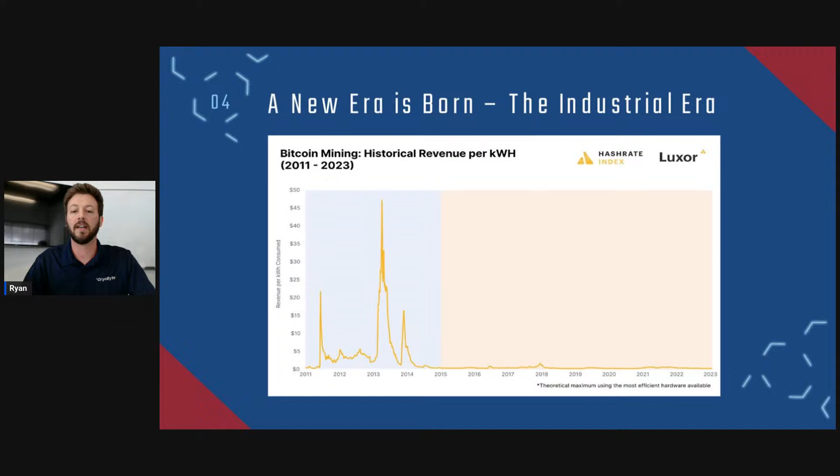But as the heat and competition started to turn up in mining, everybody was in an arms race to gather as many ASICs as they could. They started looking for cheaper and cheaper power in order to get a better profit. And you can see what that did to the revenue per kilowatt hour. It flatlined. And we see that today in the industry. It's a very competitive industry. You can't just take a miner anymore, plug it in, and print money. You have to find a lot of cheap power. You have to have a lot of advanced equipment. So it's very competitive. And my belief is it's going to continue to get even more competitive.

A clear strategy emerged with this industrial era. And I like to describe it as an energy arbitrage. It's not technically an arbitrage, but it's easy to follow. An arbitrage is when you take something of low value over here and you instantly sell it for a higher value over here, and your profit is that margin in between. And this is the strategy that most Bitcoin miners use. You access cheap power, you scale, and you put hash rate behind that power. And the third step, everybody's favorite, you profit from it. And it's that profit in between your cheap power and the Bitcoin that you're producing. That's sort of your energy arbitrage.

Now, there's a lot of evidence of this energy arbitrage across the industry. So in order to drive better profit margins and in order to stay in business, you really need cheap power. So we see that all over the place. We see these large industrial miners accessing low cost and large power purchase agreements. So locking in cheap power for a long time.

You see miners creatively going after stranded energy. So energy that was not monetized before, like flare gas and different biomass solutions, that's geographically isolated. You now can load up a bunch of miners in a container, ship them out to a flare gas site, and as long as you have an internet connection, you can harness that very cheap power to mine efficiently.

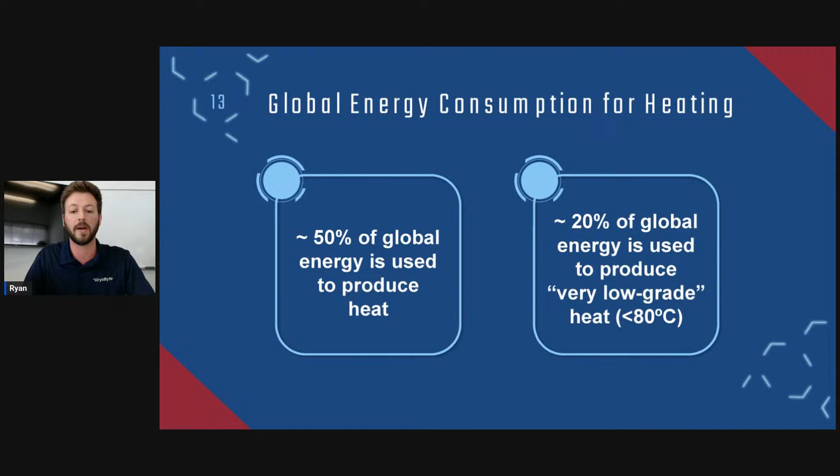But actually 20% of the global energy production is used to produce very low grade heat. This is heat that is less than 80 degrees Celsius. And that number is important because that 80 degrees is now achievable by Bitcoin mining. So another way to view this is 20% of all the energy used in the world produces heat that could theoretically be produced by Bitcoin miners as a waste product. There's a lot of opportunity there to reuse heat.

Here are some of the use cases for that very low grade heat. So residential space heating is the biggest one. 7.5% of all the world's energy goes in just to keeping houses warm, just to keep you warm at night, setting your thermostat at 70 degrees in the wintertime or whatnot. Commercial space heating, the same thing. Heating your water, being able to take a warm shower uses 3.75% of all the world's energy.

And you go down the line with food and beverage manufacturing, pulp and paper industry, greenhouses, which people are using Bitcoin miners to heat, uses 0.75% of the world's global energy. Crop drying and agricultural use. My uncle is actually a farmer, and every year he has to dry out his grain.

When he puts the beans or corn in the silo, he has to remove the moisture from them in order to keep them from spoiling and going bad. And he has to get within a certain percentage or else he gets docked when he sells the grain. But he knows going in every single year, this is going to be a business expense. He's expecting to pay for that heat, and he needs a ton of that heat in order to dry out

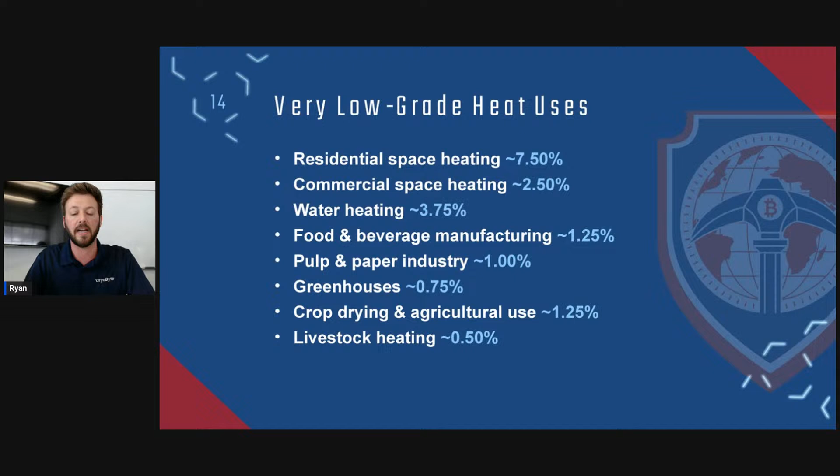his crops. So if you look at all these use cases, there's a lot of different areas where Bitcoin heat could be repurposed in order to save energy that we're already spending. If you compare that to the global Bitcoin network, assuming an 800 exahash network, we're a little bit above that, an efficiency of 25 joules per terahash, and the very low grade heat constant power consumption of 2.5 terawatts, which is just a flattened curve of average production.

If we replace just 1% of very low grade heat, we could more than double the Bitcoin network. And that is crazy. So replacing just 1% of that heat would more than double the Bitcoin network based on the power consumption that we use to create that heat.

Now, as people are saying, I think somebody just commented actually, it depends on the original energy source and conversion efficiency. That's correct. So not so fast. All heat is not created equal. And that's why we wanted to point out at the very beginning how your Bitcoin miner produces heat. It's a resistive heater. And it actually is one of the least efficient ways to produce that heat.

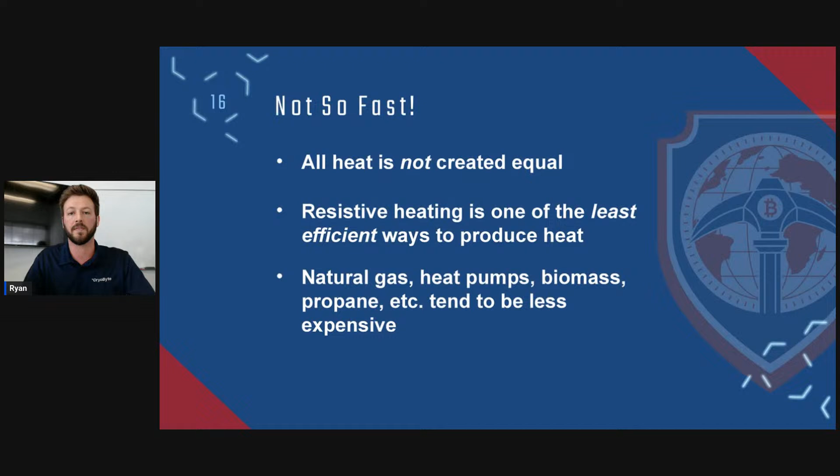That's why we use things like natural gas and heat pumps, biomass, things like that. We don't have space heaters all around our house because we would be paying 3 or 4 times more to heat our home than using natural gas or a heat pump. So it's important to know that. Here's a general breakdown, and this is very ballpark, very relative, or in general. So don't take this as gospel. This is more just as a guideline.

If you were to create heat using different heating methods, this is the relative percentage cost compared to electric resistive heating. So if I were to use heating oil like some old homes do, I could expect to pay 70 to 90% of what I would be paying to create electric resistive heating. Propane, 60 to 80, you can go down that list.

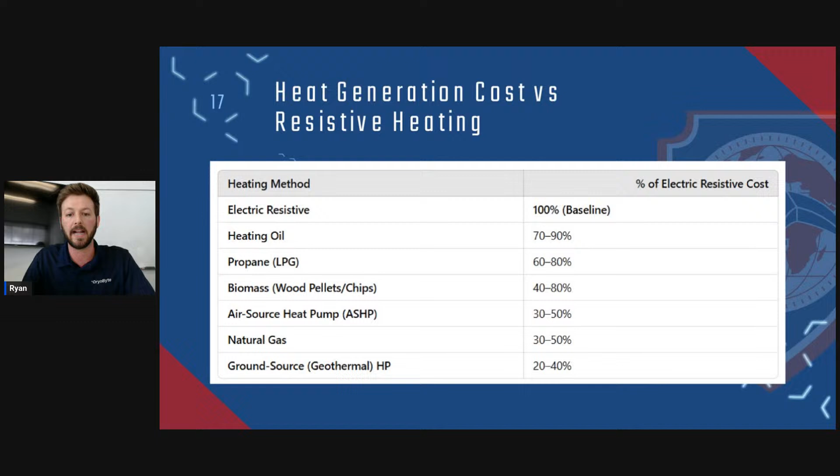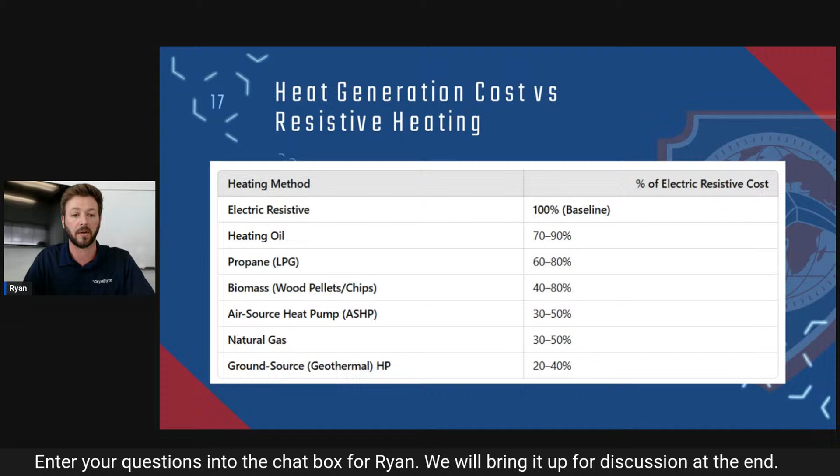If you look at the heat pumps and natural gas, you can see here that running a heat pump or using natural gas to provide heat is usually about 3 to 4 times less expensive than it would be to create that heat using electric resistive heating, aka Bitcoin mining. So you're able to produce heat much more efficiently using different methods. But there's still massive opportunity here, and this is the concept.

There are 2 reasons. So the first is that with Bitcoin mining, you are producing 2 products with 1 energy input. So all those other methods that I just showed you, none of those produce anything of value other than the heat itself. They're not paying you to produce that heat. But with Bitcoin mining, you're producing Bitcoin and you're producing that heat. So if the sum economically of your Bitcoin and your heat production are higher than the inefficiency of producing that heat, you're actually better off economically by producing heat via Bitcoin mining or electric resistive heating.

The second concept here is that heat consumers expect to have a loss. Again, when I'm heating my home, I know I'm going to have an energy bill every month, and I know I'm going to have to pay that, and I'm perfectly fine with that to keep my home warm. My uncle, the farmer, he knows that he's going to have to dry his grain out. He actually uses propane to do that because of his system he has set up there, and he knows that that's going to be a big expense every year to dry out that grain.

Now, this is nice because that means as a Bitcoin miner, in order to produce that heat, I actually don't need to mine for profit. I can actually mine at a loss. And again, as long as my total economic output from that heat and the Bitcoin itself are higher than what I would have paid for that heat, then I'm actually better off economically.

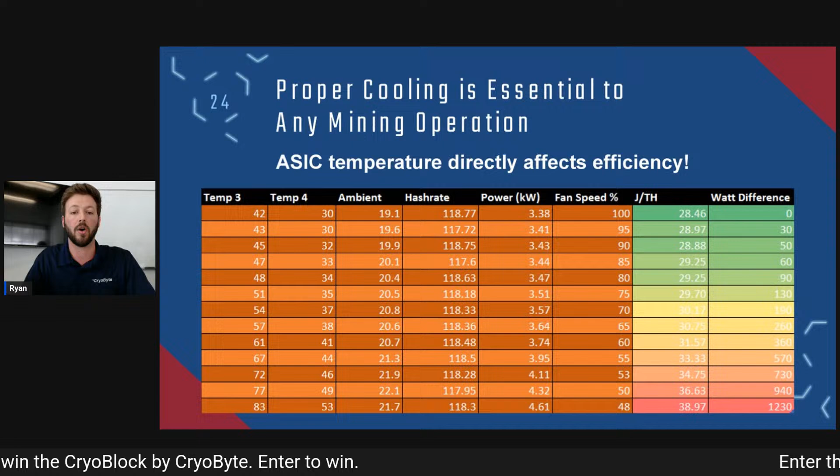As you can see here, once we start reaching 10 and 20 degrees, we start seeing efficiency drops of over 10%. So we're using 10% more energy to hash at the same hash settings simply because our ASICs are running at a hotter temperature. So cooling is extremely important to your overall efficiency. It's a good way to eke out 5 or 10% increases in efficiency just by keeping your miner running cool.

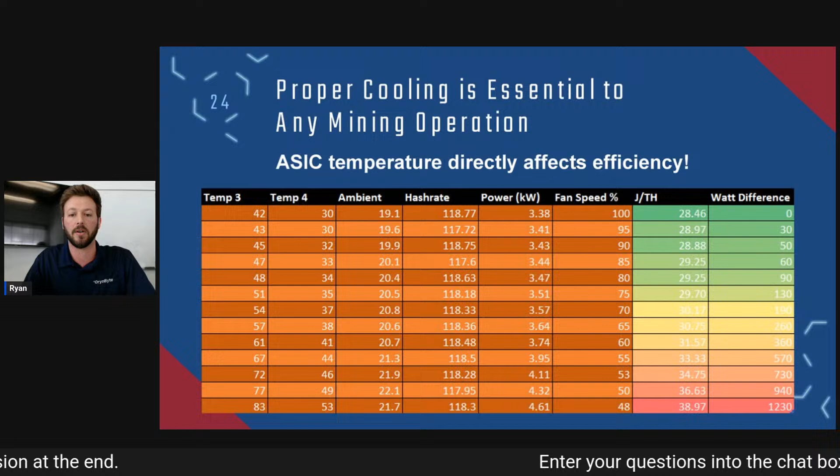And it's not just the cost savings that the temperature affects. Heat can cause thermal stress within your miner, and it can affect the miner lifespan. If you're running a miner very hot and heavy, not only are you mining inefficiently, but you're going to cause that miner most likely to fail faster. It's going to have a shorter lifespan than a miner that is well cooled.

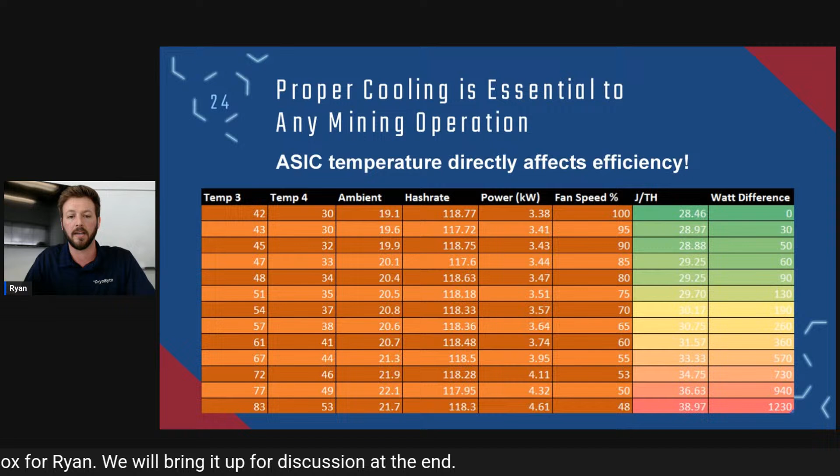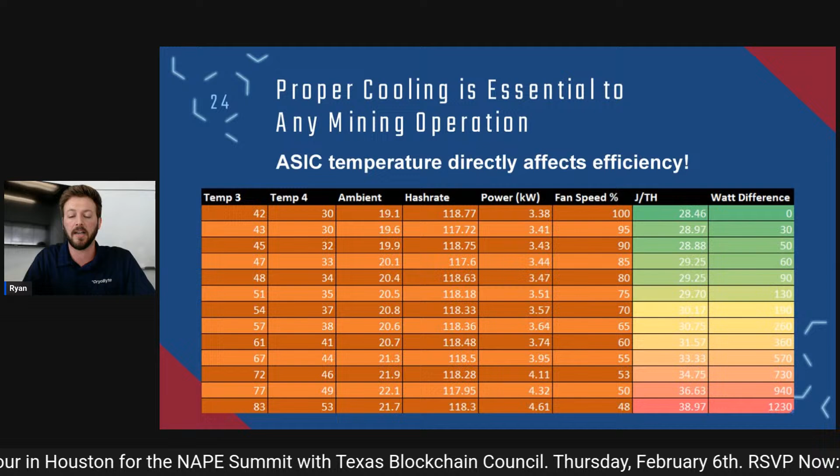So cooling is extremely important, not just for heat reuse applications, but also for mining in general. Even if you're running in one of those energy arbitrage industrial size facilities, you're going to want to pay close attention to how cool you can keep your machines. We were not the first ones or the only ones to discover this. In fact, this is from Braiins, a popular firmware producer. They ran basically the same exact scenario and they had the same exact results.

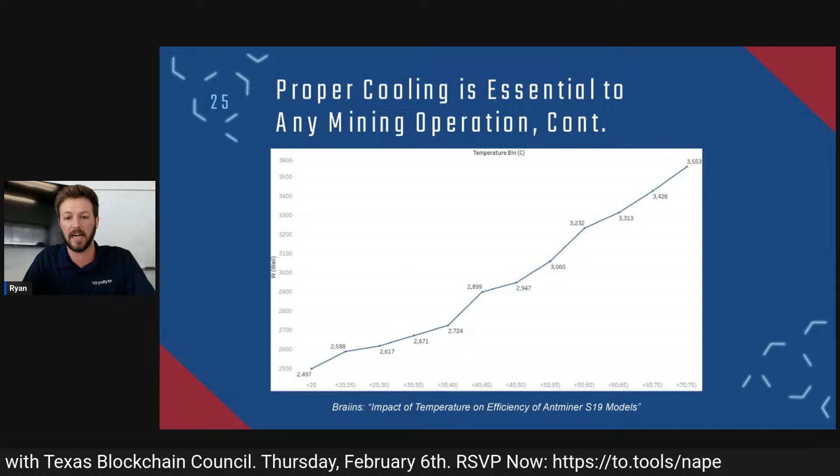You can see here that just based on temperature, you can actually have a kilowatt more of energy use when your ASICs are running hotter. Now that's a wide temperature range, so that's probably not going to be that drastic in real life. But if you're saving a few hundred watts of energy, you're mining 10% more efficiently, you're getting more hash rate, you're using less energy, you have more overhead in your mining facility to put more machines in, you're really maximizing all that energy to its full potential. So cooling is extremely essential.

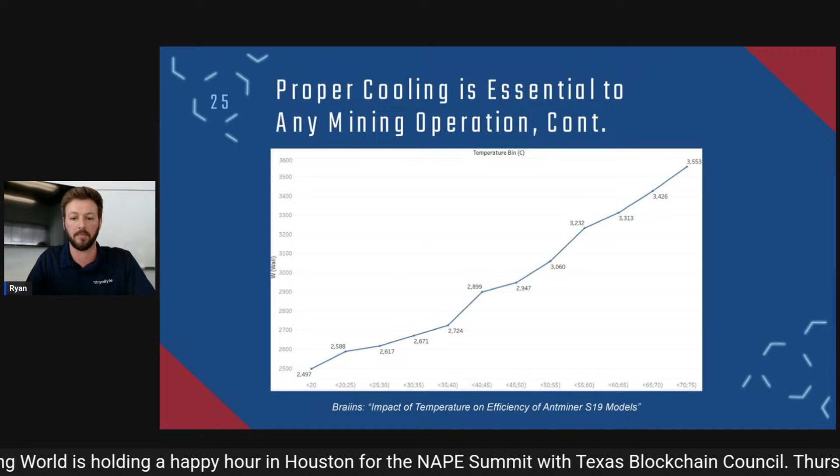Now the question we get asked a lot is, okay, if cooling is so essential, should I be using air cooling, immersion cooling, or hydro cooling? And the answer truly is it depends. There are so many factors that affect this question. So there's no right or wrong method. A lot of miners have cooling methods that they prefer.

So in general, though, what we found is that for smaller miners, if you were to use hydro or direct to chip, you actually tend to get the best cooling performance, which gives you the best overall efficiencies, especially when you account for cost. So there are some small miners that are getting into immersion mining, and there are a lot of benefits to immersion mining. But if you look at the overall efficiencies and the overall cost, for a lot of small miners, hydro is actually a better option.

Now, there are barriers to get into hydro, especially as a small miner. So hydro cooling tends to be focused on the large industrial miners. Hydro does such a good job at cooling your chips that you can actually densely pack a miner and consume a ton of energy in a very high hash rate by cooling with water. So you're creating these very power dense machines that consume a ton of power, and they need to run on 3-phase power. And then you have to have complex cooling infrastructure.

You have to have giant dry coolers if you're moving the heat outdoors. You have to have piping and all this stuff run. So it doesn't make sense for a heat reuse application. You know, I'm not going to put a data center in a greenhouse simply to reuse the heat. But if I want to mine efficiently, and if I want the other benefits of hydro cooling, it's really not attainable as a small miner.

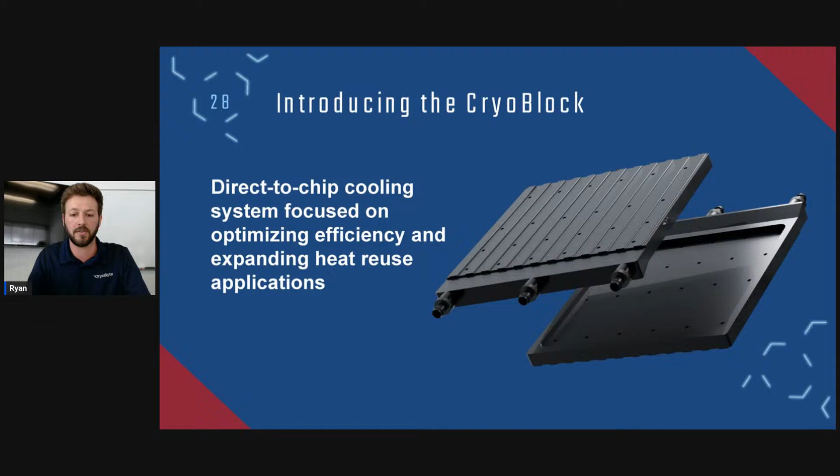Now, what we're pictured here are our CryoBlocks. So the CryoBlock is actually the cold plate of the system. These are a patent pending design that allow you to cool your device much more efficiently. And those are part of an overall upgrade kit. So you can actually purchase an upgrade kit to upgrade an air-cooled miner. And those CryoBlocks simply replace the heat sinks on your air-cooled miner.

So you unscrew the heat sinks, you put the CryoBlocks on, and then you're able to circulate water or coolant through those blocks. You provide better cooling, you capture that heat from the ASIC chips via liquid, and it gives you the increases in efficiency, gives you increases in performance. You can actually overclock your miners by a crazy amount, where the PSU ends up being your top limit and your bottleneck and not so much the temperature.

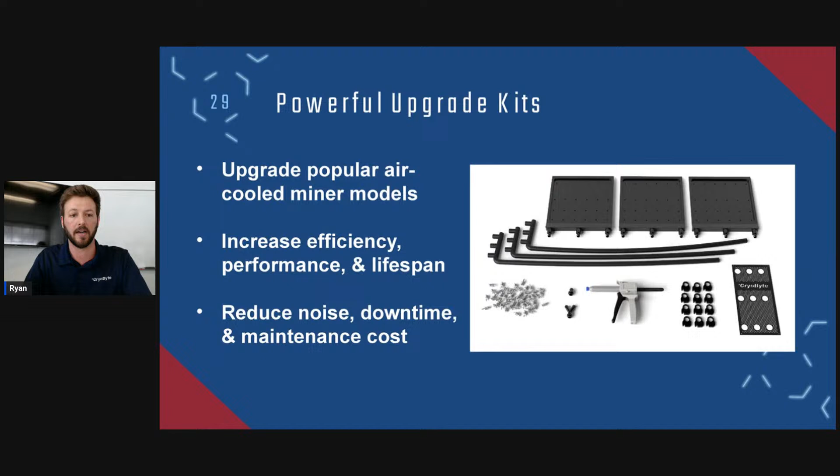And it also takes the thermal stress off of that miner, so you can actually increase the lifespan of that miner. You're also not pushing a ton of air through that miner anymore, so you don't have those loud cooling fans, so you reduce your noise. You reduce the downtime. You don't have all that dust accumulating internally there, so you reduce the maintenance cost as well. So there's a lot of benefits to upgrading an air-cooled miner to be a powerful hydro-cooled miner.

Now, it's also great for heat reuse. Like I've been saying, you can actually capture that heat from the ASIC chips in liquid. Liquid is much more efficient to move and to pump places. So if I wanted to move the heat outdoors, it's a lot easier for me and more efficient for me to pump it as a liquid than to try to pump it as air. Air does not move nearly as efficiently.

So I can actually expand my heat reuse by capturing in liquid too. I can then heat other liquid applications. So I could heat a swimming pool or a hot tub or a water heater. So you can use liquid to liquid plate heat exchangers that then allow you to expand your heat reuse applications.

One of my favorite benefits of upgrading a miner is the ability to have a flexible form factor. When you think about an air-cooled miner, you are forcing the air through the hash boards of your miner, and you really don't have any other option when it comes to air cooling. You just have to push through as much air as you can through that same form factor in order to cool your machine.

But when you actually capture that heat from inside your miner and you extract that heat, you then have the flexibility to exhaust that heat over any form factor that you want. So you can pump it outside to a dry cooler. You could use a nice little compact desktop radiator unit that actually can exhaust that heat. And that's exactly what we did in an experiment.

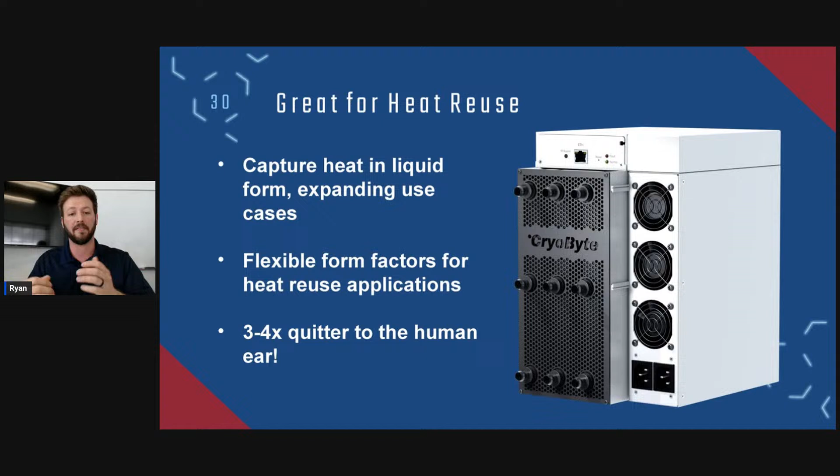But you don't want that noise, so you kind of have a dilemma. Do you want slower fans and less noise, or do you want better cooling with a very loud, annoying miner next to you? Well, with our heat upgrade units, with these kits that we provide, you can actually get the best of both worlds. You can provide that same cooling. You can run at the same efficiencies or better efficiencies, while also reducing the noise. So you get the best of both worlds.

Now, the power comes from our upgraded water blocks, those CryoBlocks, as I called them before. So we packed a lot of technology into those. They just look like normal cooling blocks to most people, but internally, we've done a lot to improve heat dissipation. So we've been able to modify the flow of the coolant, and it flows in a much more efficient way to provide even cooling to all your chips.

Now, this is a CFD, a computational fluid dynamic analysis that we performed, comparing our CryoBlock on the right to a standard water block on the left. And as you can see, we have much better cooling. We eliminate a ton of hot spots. We're able to give a much more even, consistent temperature profile to all your ASIC chips.

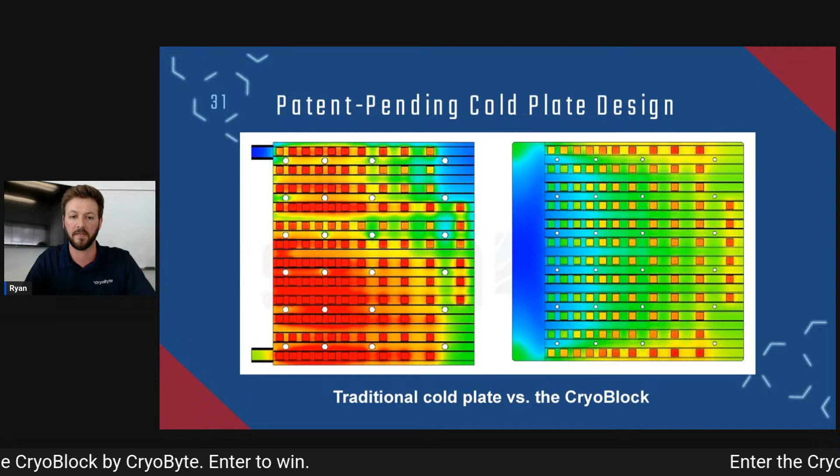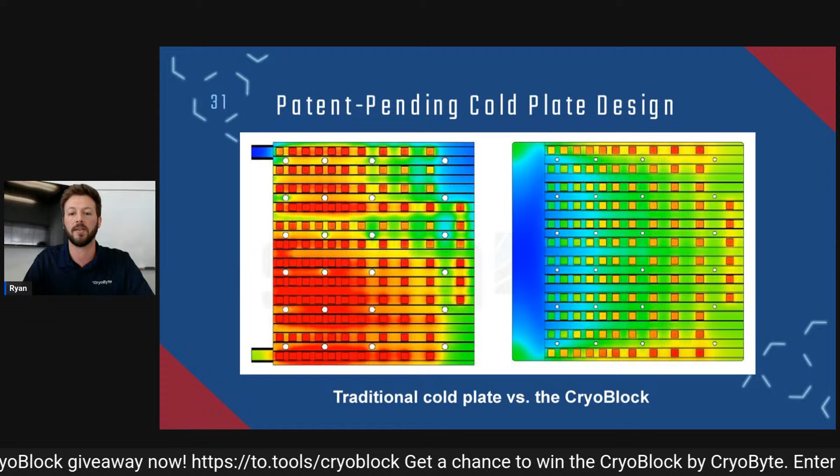In addition to optimized flow of coolant, we have internal microfin structures that allow you to dissipate heat much more efficiently. And what this means to you as a miner is you're going to get better cooling. You're going to have chips that run at lower temperatures. You're going to get higher efficiencies. You're going to get longer lifespan with your miner because you're providing it better cooling.

Now, an example of this in the real world, so this is actually one of our units. We ran a test here. We were about 25 degrees Celsius on an ambient temperature, but our maximum chip temperature, the hottest temperature on the entire unit, was only running at 49.5 degrees. And that's insane. You don't see that type of cooling on a standard air-cooled miner. You don't even see that on an immersion system or even a hydro system. But it's thanks to our CryoBlocks that we're able to provide a lot of cooling.

So if you're in a high heat environment, even here where I'm located in Ohio, the temperature gets really hot in the summertime. In fact, we had a warehouse that we ran tests on where it was 104 degrees Fahrenheit in the summertime, peak of summer in July. We had a miner running in there. We had no ventilation, so no air moving in or out of this warehouse. And that miner was running with chip temperatures that were in the 60s at the highest temperatures. So running very efficiently, even in an extremely hot environment.

There's no thermal throttling, so you have higher uptimes. You're really reducing the thermal stress that your miner experiences. So there's a ton of opportunity for miners there in high heat environments.

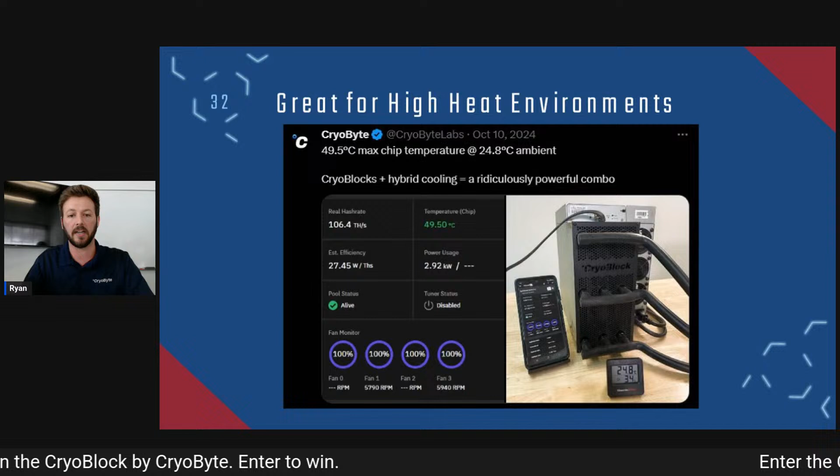Like I mentioned before, you can also overclock these things. When you overclock, you start raising your temperature quite quickly. And as we saw from all those previous studies and tests, that really decreases your mining efficiency. So as long as you're keeping your miner cool, you can actually perform these overclocks. You can overclock at a higher rate, and you can do so much more efficiently than just a standard air-cooled miner.

Another thing that we did, and it's hard to see here, but we ran a side-by-side to compare energy savings. We ran a stock S19 next to an upgraded S19 with our CryoBlocks installed. And what we saw was a 14 degrees Celsius lower chip temperature. We consumed 410 watts less with the upgraded miner. So again, same exact environment, same conditions. Our upgraded miner with our hydro-cooled direct-to-chip solutions ran much better.

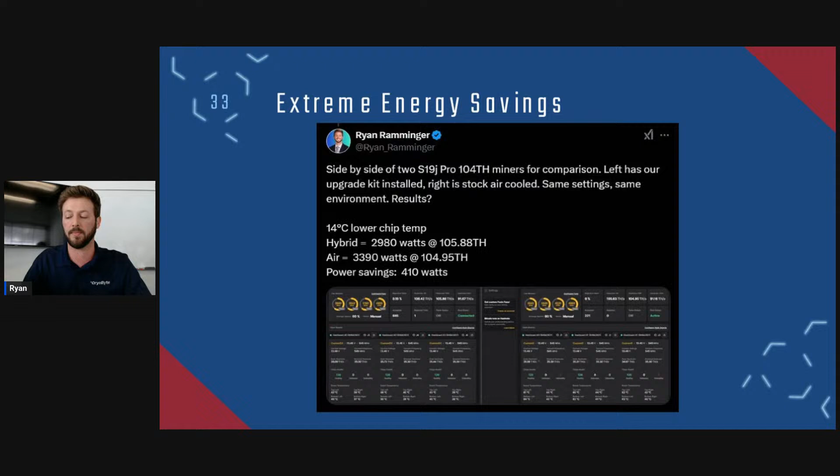Thank you, Chad. Chad just said he can confirm that he burned up two out of three boards on an S21 overclocking with air cooling. And that's exactly right. Your chips are experiencing a lot of thermal stress. Even sometimes when they say they're in the appropriate limit, it's honestly like a silent killer. Everything can look fine, but if you're pushing those chips farther, they're going to end up getting burned out quicker. So as long as you are providing adequate cooling, especially via a CryoBlock, you're able to overclock those efficiently and safely.

So I know I'm just spitballing at you. I'm throwing a ton of information, but overall, if you want to run a more efficient mining operation, what I would beg you to do is look at your cooling, because cooling is a good way that you can eke out 5, 10, 15% increases in efficiency by increasing your miner's performance, the lifespan. You reduce the noise, the downtime.

And if you are looking at heat reuse applications, like we talked about during this presentation, capturing that heat in liquid form gives you the ability to expand those applications and make them a lot better.

So I appreciate you guys listening to me ramble for a little bit. I'm going to actually hand it back to Trevor. Trevor, do you have any thoughts on heat reuse and about some builds that you have in mind?

Man, I have tons of thoughts. I have so many things running through my mind right now. One of the biggest things that I'm looking forward to building is a radiant heat floor system. I don't know if any of you are familiar with Cade Peterson from Softwarm LLC, but he has done several radiant heat systems going through concrete to create snow melt systems.

Now, my thought is taking a CryoBlock direct to chip upgrade unit and running that water through a heat exchanger, or even just straight through the tubes themselves, into a radiant floor system to heat my home. That is an idea that I've been thinking about for a while. But some other ideas that I've been thinking about are hot water heaters.